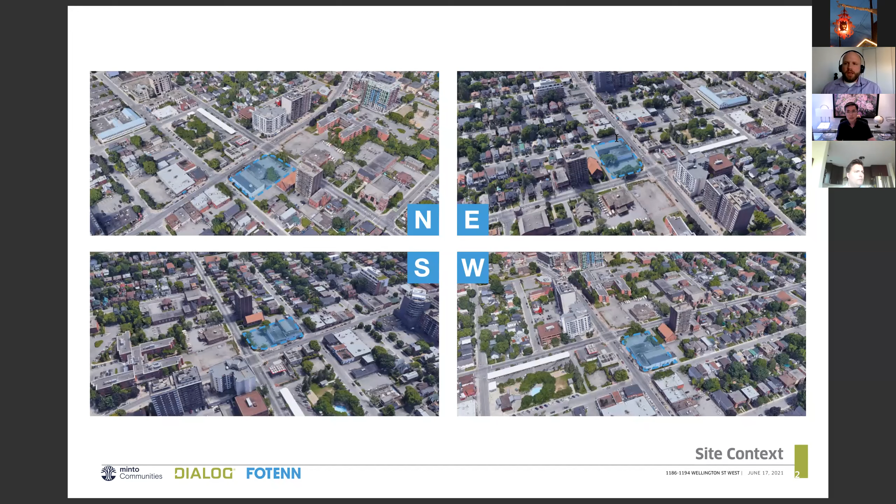The next slide is the official plan. The official plan designation for the property is Traditional Main Street, given the Wellington Street frontage. Traditional Main Streets in the official plan are envisioned as compact, pedestrian-oriented, mixed-use streets, and they are target areas for intensification. New buildings are encouraged to enclose the street edge and create a pedestrian-friendly scale and environment along this street.

Policies of the official plan support heights up to 9 stories generally, unless a secondary plan specifies otherwise, as it does in this case—we'll talk about that shortly. Requests for greater heights than 9 stories are considered under specific criteria in the official plan, including proximity to transit, provision of a community benefit, conformity with urban design compatibility policies, and a comprehensive review of impacts. Our work to date, preparing this application over the past few months, has involved looking at those criteria as we propose a building of greater height at this location.

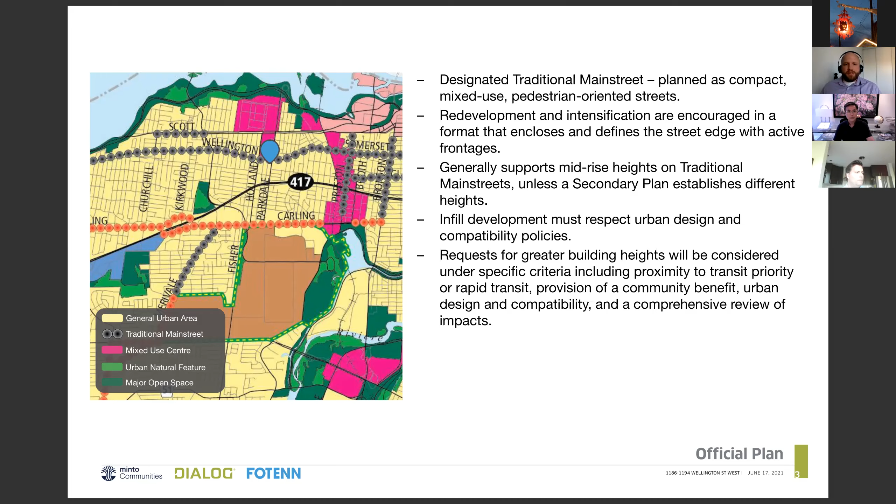Looking at the CDP and secondary plan, the property is within the Traditional Main Street designation in the Parkdale Park area, shown here on the map. Both plans speak a fair bit about the intersection of Parkdale and Wellington, recognizing its importance and prominence within the corridor.

Development at this corner is encouraged to include a variety of active uses at grade—retail, restaurant type uses—and also encourages widening the sidewalk and public realm to provide more space at the corner of Parkdale and Wellington, and along the street where sidewalk width is fairly limited. The secondary plan and CDP support building heights generally up to 6 stories along the corridor, but at the intersection of Parkdale and Wellington, it recognizes a height of 9 stories at the corner, given its prominence.

As Kevin noted, we are planning to propose an official plan amendment to permit the proposal we're here to talk about tonight, amending the secondary plan to permit the taller building. In terms of the zoning bylaw, this site is zoned Traditional Main Street with subzone 11.

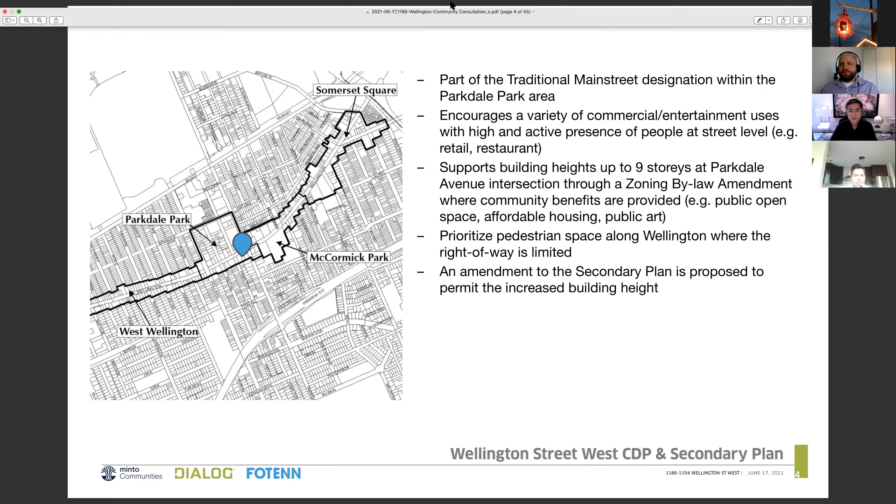The Traditional Main Street zone permits a range of mixed uses, including retail and residential, as proposed here. Exception 1815, which applies to the corner property—essentially the Rexall parking lot—also sets a minimum building height of 4 stories, given the corner location. We will be submitting a zoning bylaw amendment together with the official plan amendment to permit the proposed development, rezoning the three parcels that make up the subject property with a site-specific exception and schedule.

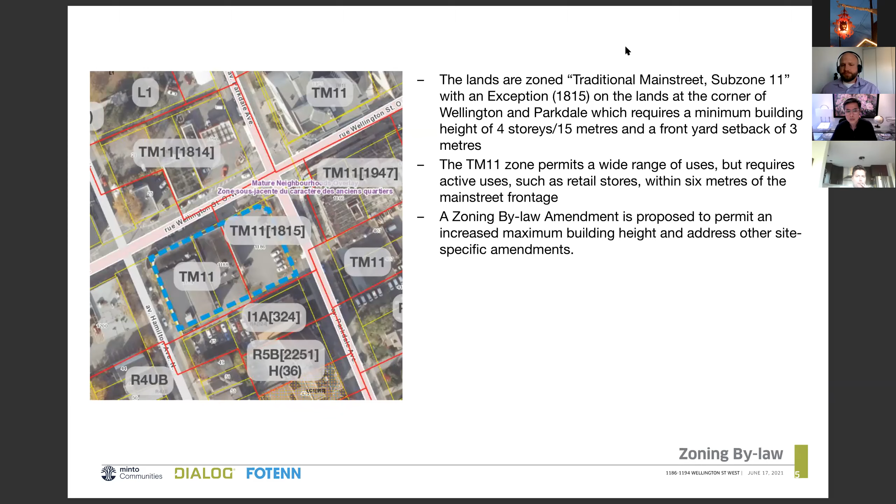So I think the most prominent question, as Kevin noted, is why a high-rise at this location? We've put a lot of thought into why we think a high-rise fits at this corner. We are proposing an 18-story building right on the corner of Wellington and Parkdale, with a 6-story podium extending across the Wellington Street frontage and stepping down to 1 story along Hamilton Avenue. Simon will present more details of that.

A few reasons we felt this site was appropriate for high rise are noted here. First, lot size. Along this corridor, the full block width is fairly rare, and it affords us the opportunity to transition within the site from a higher building down to the adjacent low rise and down to other parts of the corridor. Given the corner, we felt that's doable and appropriate for the site.

The site also has 3 public street frontages, which provides lots of opportunity for activity and pedestrian interaction at street level. We've tried to do that through retail uses at grade and a POPS space extending around the side of the building. We also recognize the prominence of the intersection, as does the CDP in the secondary plan. It's an important intersection and deserves to be marked.

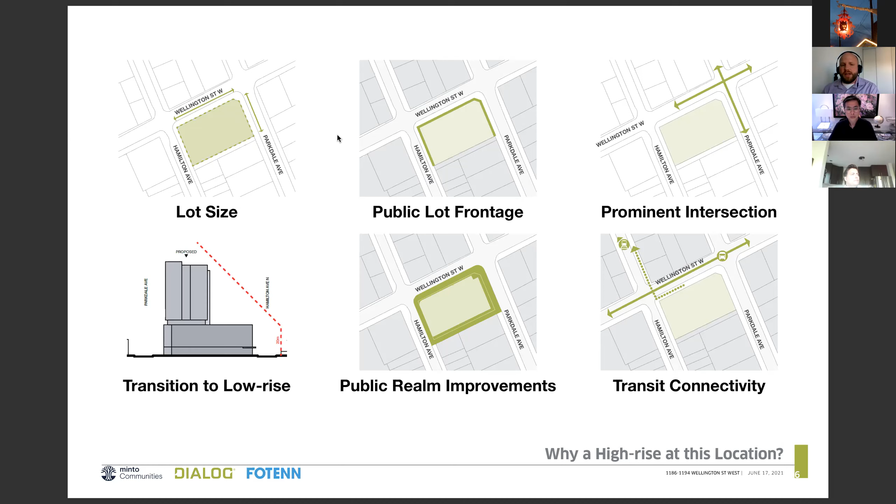So those are the reasons we've come to for a high-rise building, and we intend to put those forward as part of our secondary plan amendment, as criteria for why this site, in our opinion, fits for high-rise. Finally, looking at the urban design guidelines on the next slide, Simon, for traditional main streets and urban design guidelines for high-rise buildings, we've looked at both in terms of the design of the building. These provide direction for both traditional main streets and high-rise buildings.

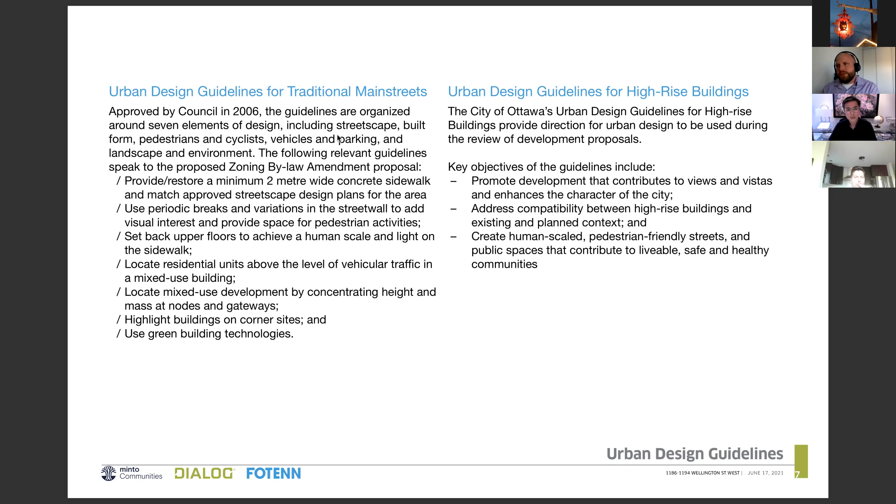We've taken the direction we can from that and applied it to the building - things like the angular planes and separation from high-rises, the height of the podium, that sort of thing. So with that, I'll pass it over to Simon, who will walk you through the actual design of the building.

Thank you, Paul. In this context view, I'd like to recap a little about the context. Our site is shown in the middle in purple. The existing buildings are shown in gray, including a 13-story apartment just south of us on Parkdale. The approved buildings are shown in orange, including a 9-story building just to the east on the other side of Parkdale, and an approved 18-story development on Parkdale, 1 block north of Wellington.

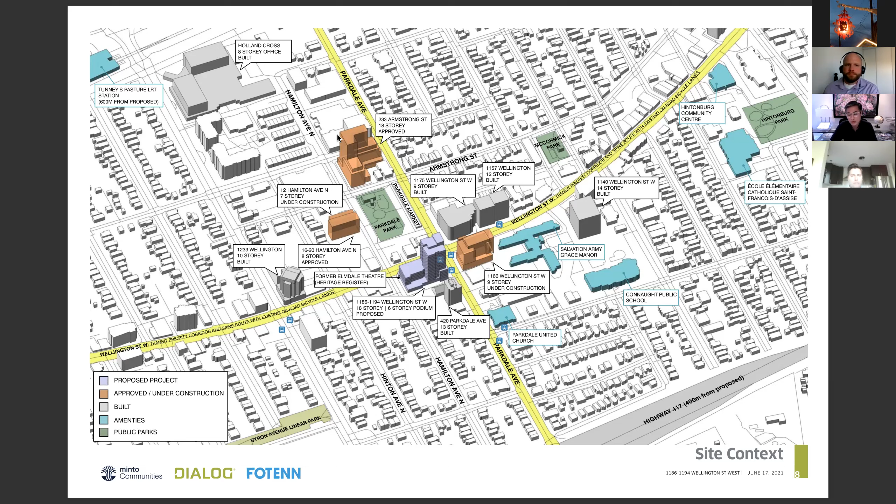The surrounding amenities are shown in light blue, and our site is about 800 meters to the Tunney's Pasture LRT station, as Paul mentioned. For the green spaces, Parkdale Park is not far to the north, and McCormick Park is to the northeast.

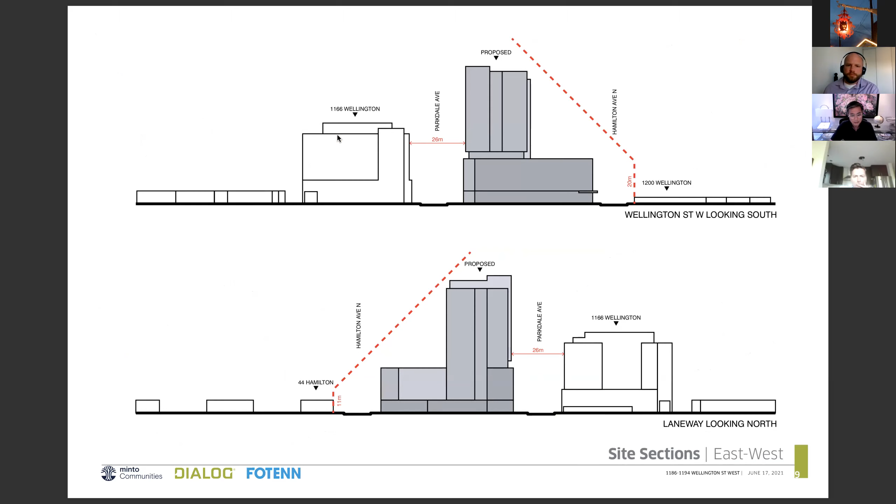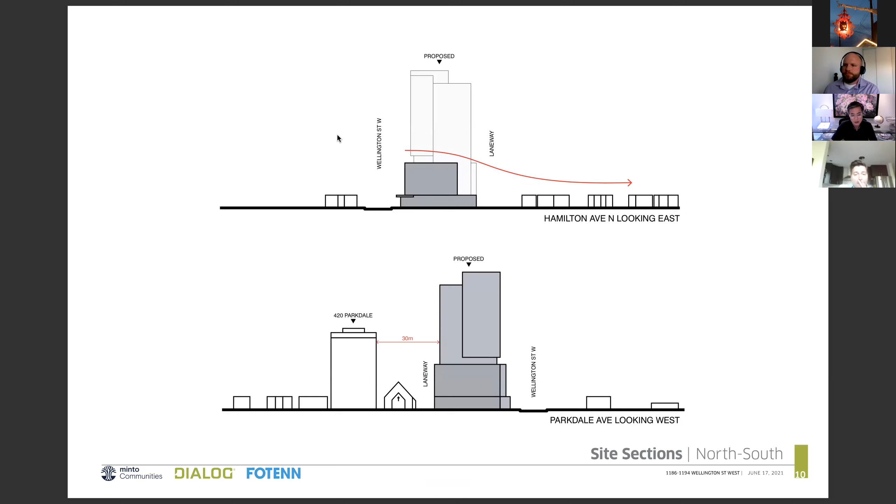Here's the top elevation cut along the Hamilton side looking east, with the 6-story podium of the building in the foreground, relating and transitioning to the existing low-rise residential buildings to the right along Hamilton. The bottom one is cut along Parkdale looking west, with the 14-story existing building on the left and the existing church in between. Our proposed development maintains a 30-meter separation distance to the existing 14-story building.

For building massing, we have the 1-story base, mostly retail. Initially, we added an 8-story residential podium on top to make a 9-story building. But because it was rather massive, after discussion with staff and councilor, we decided to reduce by 3 stories to make a 6-story podium.

We also recessed the corner at Parkdale as a POPS and added a 3-meter setback along Parkdale to widen the public realm. And we proposed to remake the Elmdale Theater marquee canopy at the Hamilton corner as a special feature.

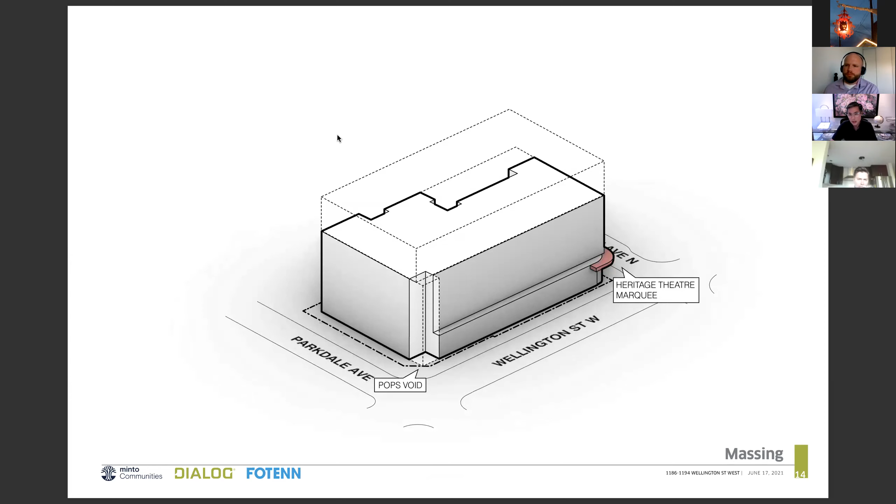With the reduction of the 3 stories, we added the floor area in a vertical mass to the Parkdale side and kept the main podium along Wellington at 6 stories, creating a lower scale along Wellington and a better transition to the low-rise on Hamilton. We also believe the taller height on Parkdale can create more hierarchy there, noting there is more transit and more pedestrian movement on this busy corridor.

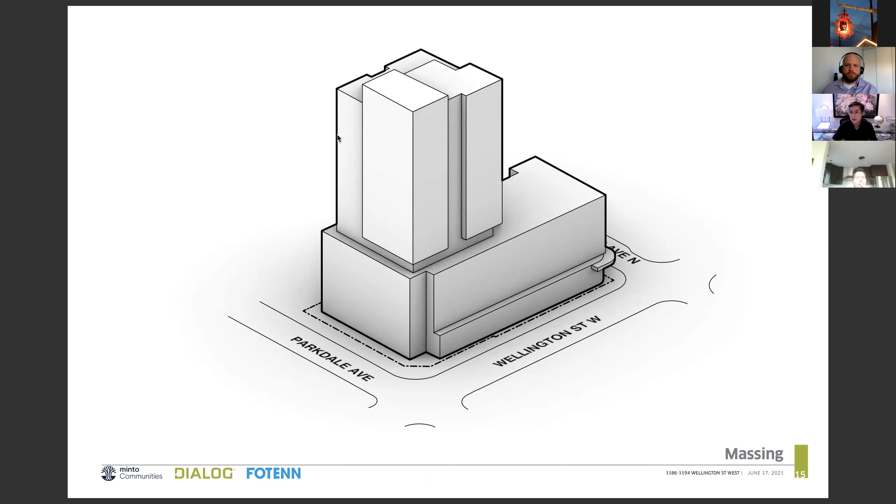This illustrates the podium and the various uses of our proposed building. In the site plan, the lightest gray color is the 1-story podium. Then we step back right away and go up to 6 stories. The taller portion on the right is shifted to the east along Parkdale.

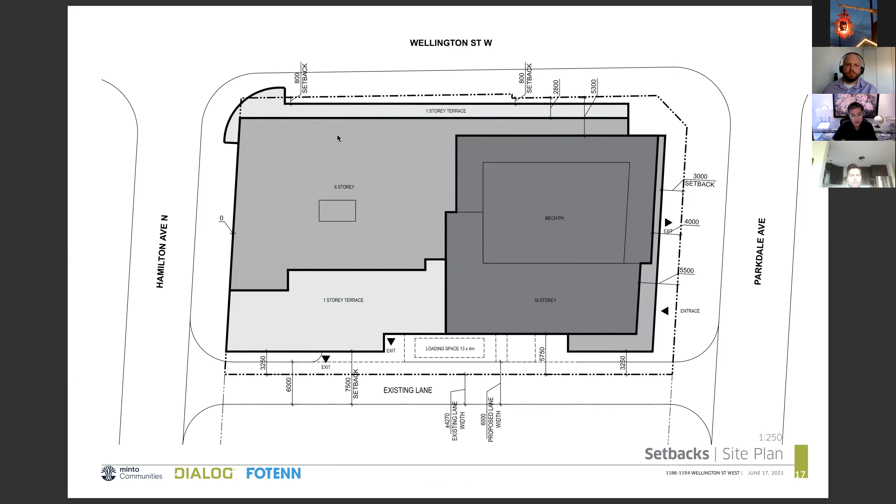At the ground level, the retail fully lines the Wellington frontage. The north retail face is set back another 0.8 meters to create a wider public realm on Wellington. The northeast corner is recessed as a larger POPS space together with a 3-meter setback on Parkdale.

In the northwest corner, there's a recreated Elmdale Theater marquee entrance canopy. These two corners of the Wellington frontage will nicely bookend this block and help activate this neighborhood along the stretch. The ramp, bike parking, garbage storage, and loading are placed towards the center in the back, while the retail and the residential lobby anchor the two outside ends.

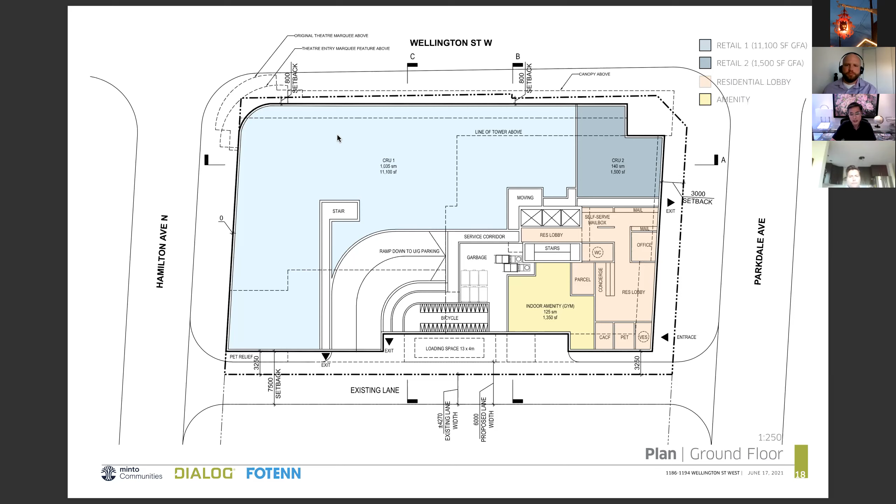We want to widen the existing laneway to a full 6-meter width and dress it up as a woonerf, to make it a safe and pleasant environment.

Going up, this is the typical floor plan podium with residential units lining Wellington with a minimum of 2.8 meters setback. The typical tower plate starts on the 8th floor and goes up to the 18th floor, with a total 5.3 meter setback on Wellington and 4 meters on the Parkdale side. The floor plate is 750 square meters with 12 units per floor.

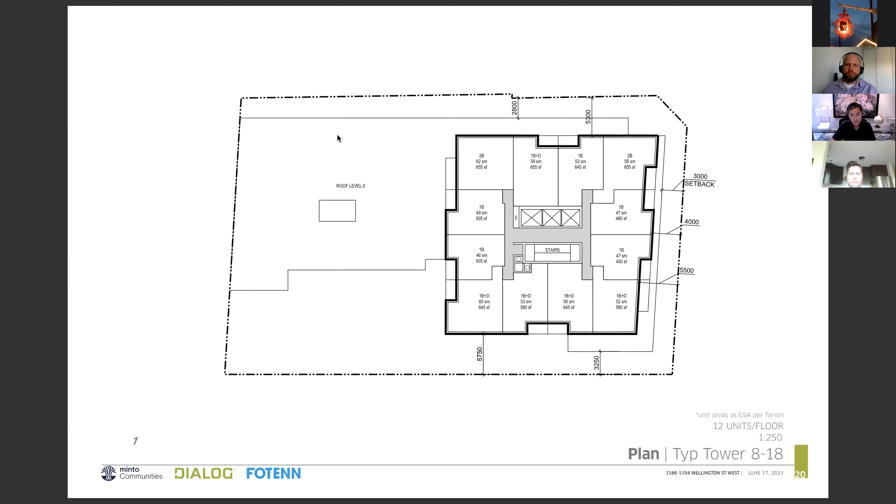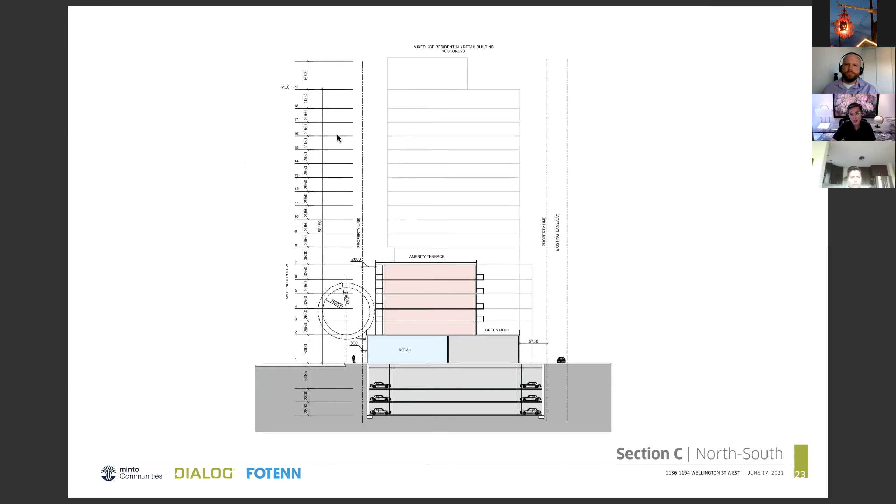Here are a few massing views of the proposal. Notice we put the height and density on the Parkdale side and lowered the podium to 6 stories along Wellington, which works well with preserving the spirit of the recreated Elmdale Theater marquee at the Hamilton corner, and to scale down the heights towards the Hamilton side and the south side of Hamilton.

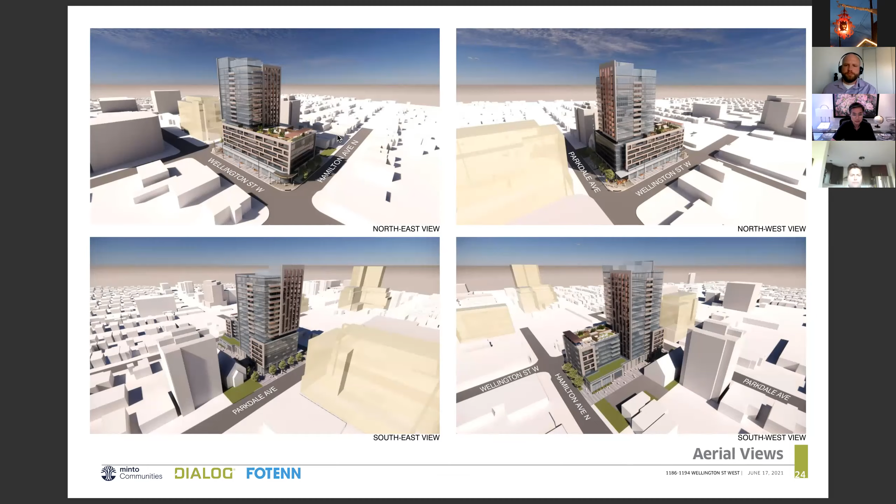Here's the north elevation, along Wellington, with a continuous glazed retail canopy with masonry piers, accompanied by its continuous glazed canopy. There's the POPS at Parkdale on the left, very close to the existing bus stop.

The 6-story podium is clad with masonry with various sized openings for windows and balconies, but with a more horizontal emphasis, keeping a comfortable scale and proportion for this main street. The setback taller portion is treated much more simply and cleanly, while focusing on the articulation of the 6-story podium.

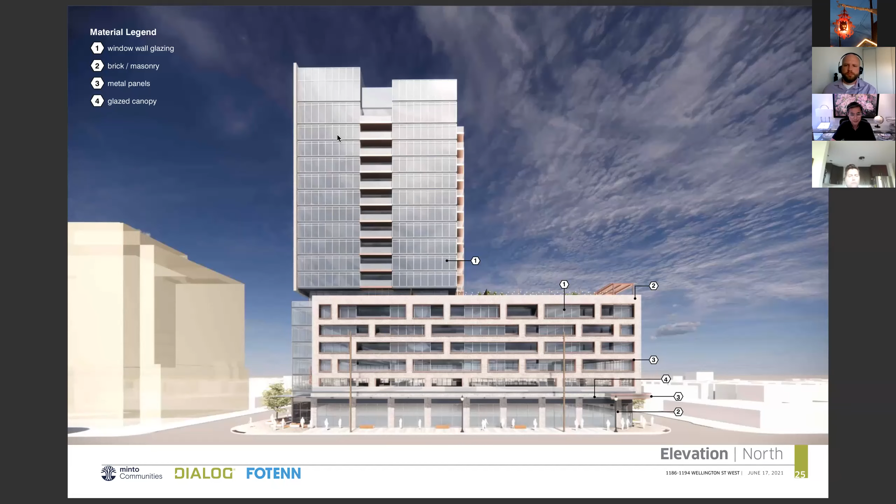This is the east elevation on Parkdale. Our building is separated from the South Church property by a laneway, seen in the middle, and the massing of the existing 14-story building on the left.

On this elevation, we want to do the opposite of the north elevation, reversing the masonry treatment to the taller portion for vertical emphasis and downplaying the amount of balconies, while on the podium we want to keep things clean and simple, with a few French balconies.

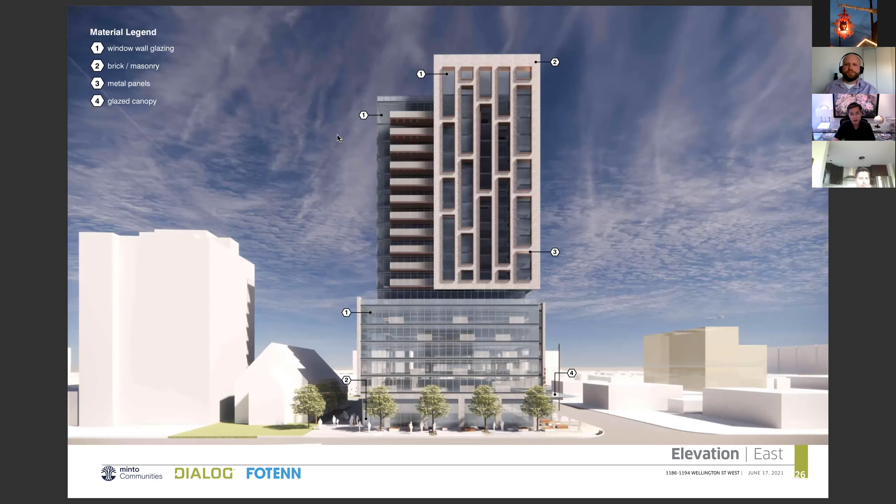Similarly, on the west elevation, the end portion of the 6-story podium is a simple facade with French balconies, anchored by retail at the ground level with the same masonry pier treatment. The taller portion is fully recessed, intentionally, away from Hamilton.

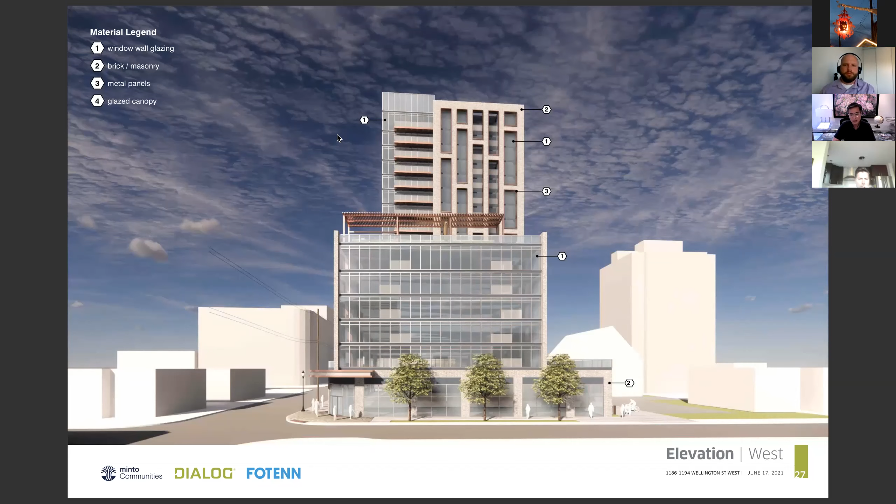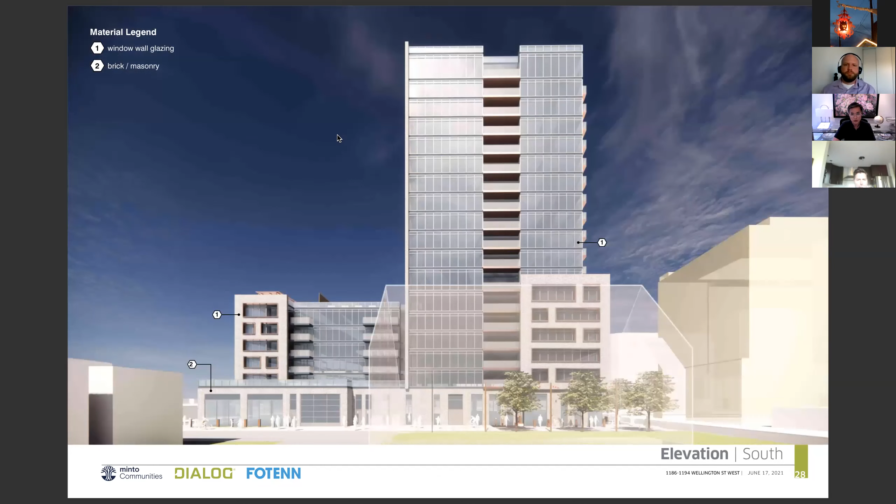The shift of the massing from the 6 stories to the 18-story tower is very apparent in this view, with the existing church property in the foreground hiding the base of the building.

This is an eye-level view on Wellington, showing the recessed POPs with the 3-meter setback along Parkdale, the masonry detail facade of the 6-story podium, and the ground level masonry piers with continuous glazed canopy, enhancing the public realm and pedestrian environment, especially at the corner where the POPs is.

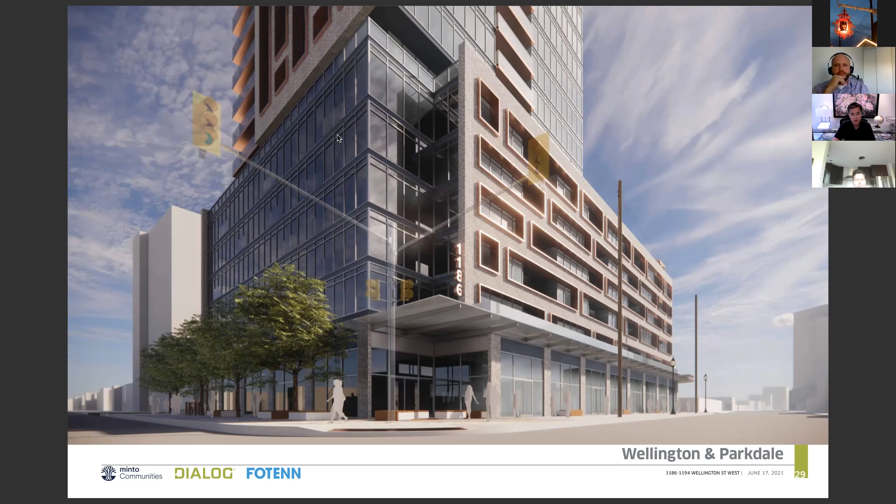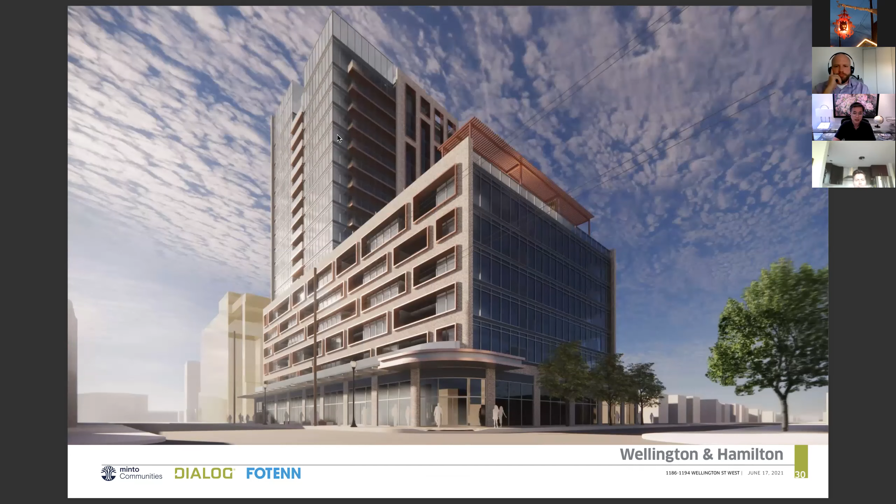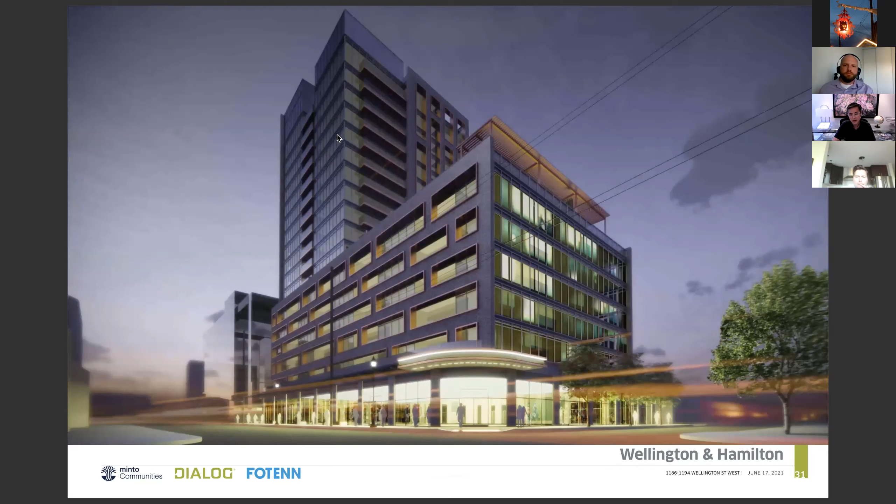This is on Wellington at the corner of Hamilton, showing the recreated Elmdale Theater marquee canopy and the retail entrance addressing this special corner. This is the same view on Wellington, showing the recreated canopy lit up at night, with the corner as an entrance anchoring the public realm from this end of the block.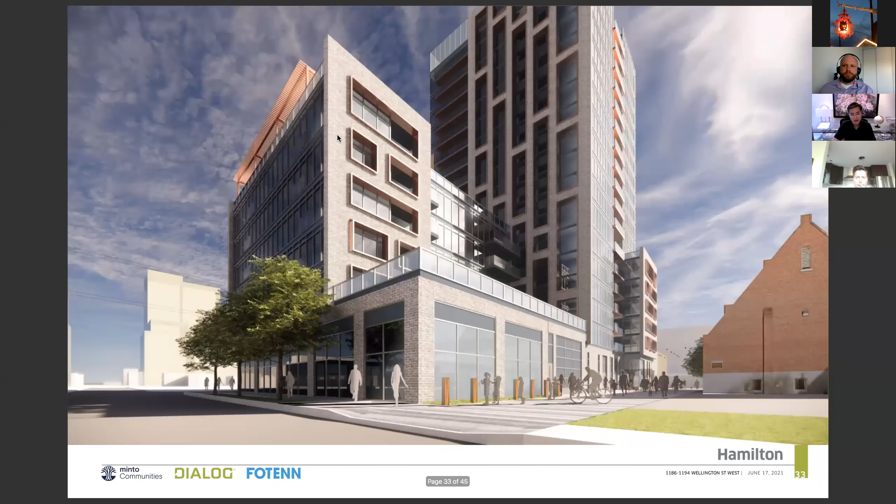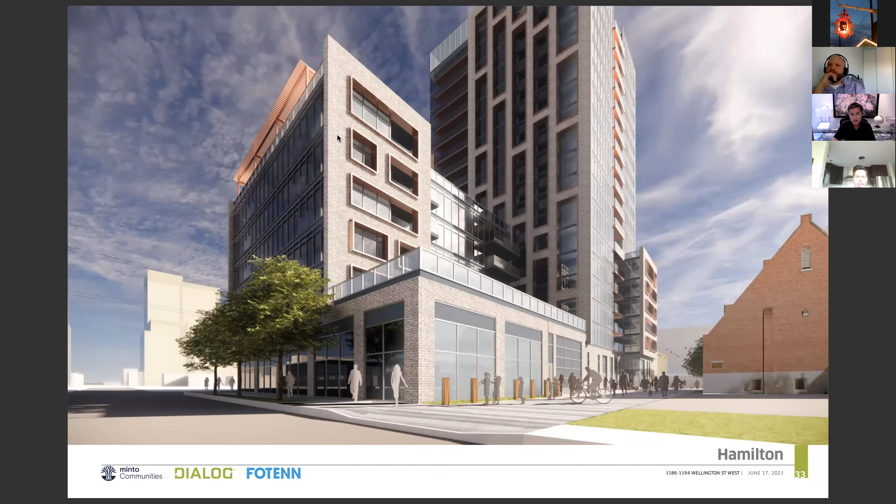This view is closer up on Hamilton, on the south laneway looking from the west. There's an imagined laneway with special paving, activated and much improved compared to the current state of a back lane. At this end, the retail can wrap this corner with much needed activity.

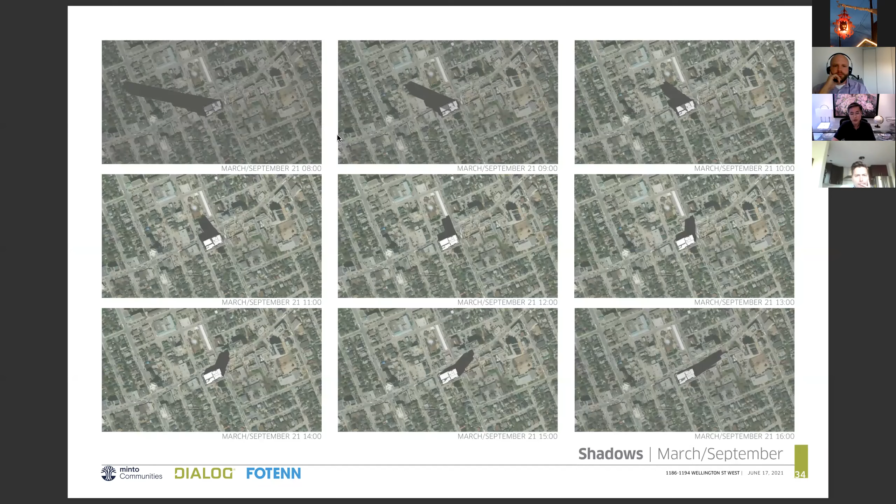Here are some shadow studies we did, showing the March and September shadows. Most of the shadows fall onto the commercial lands to the north of the site, and our shadows have very little or no impact on Parkdale Park to the north, more so in March and September.

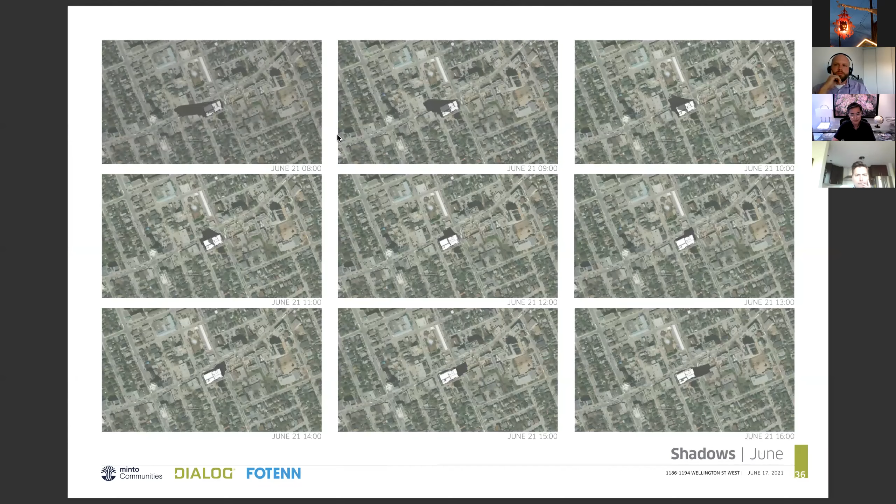And here's Bryce, my partner on the landscape design. I'm going to take you from December into the summer months, my preferred months, and take a look at the landscape.

The landscape and site design responds to both the architecture and the context of the site. As mentioned before by Paul, we truly are taking a 360-degree approach, using distinct paving that will wrap around the building, improving the public realm and building interfaces on all sides. The northeast and northwest corners have unique unit paving that will act as a welcome mat into the building and complement the cinematic gestures that Simon was talking about, carried through in the architecture.

We're looking to improve the pedestrian experience around the site by planting street trees wherever possible, using soil cells to improve soil volume and negotiate utilities on Parkdale Avenue, and planting softscape on Hamilton and the adjacent church lot. The trees will have the right environment to grow substantially and bring character, comfort, and improved canopy to shade the area.

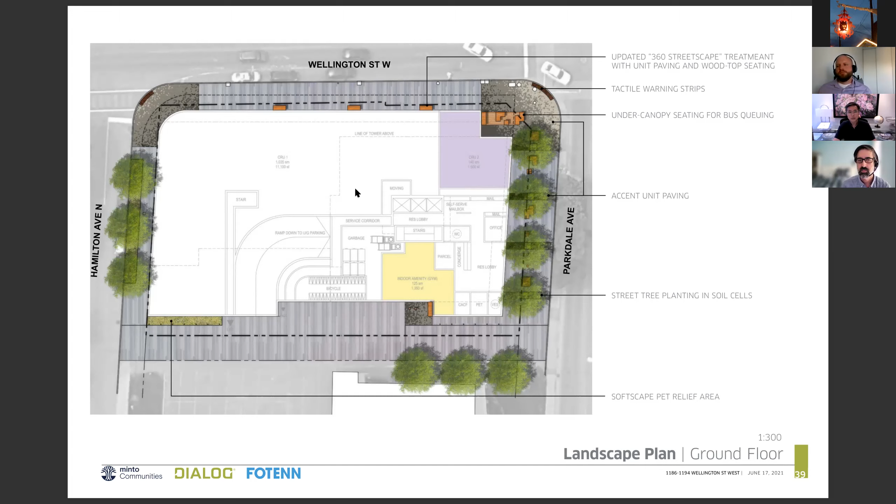A key part of the landscape design is the additional privately owned and publicly accessible space. Our design intent is to seamlessly integrate the designed POP space into the improved public realm network.

The northeast corner is where you'll see most of that, and it supports this notion of the POPs through the use of bespoke benches. Flexible in the layout, they'll enable access to the building, but also be a space for transit users to casually wait for the Parliament bus.

This will happen while they'll be protected from the elements by the extended canopy above, shown earlier. Adding both feature lighting within the benches and projection from the canopy above, the space will be vibrantly animated in the evening, making it a safe place to be at night. The focal point of the corner carries south along Parkdale with an improved paving treatment above the soil cell system.

This leads us to the laneway, which extends to the southern entrance. The unit paving we're proposing, if you're aware of the paving over at Lansdowne, we're suggesting the same type of paver. There will be a reduction of curbs and an introduction of bollards to support that approach. In many ways, it's designed as a Woonerf.

It'll be more than back of house. Cyclists can lock their bicycles next to the gym amenity and maintain their bikes with a repair station. A dog relief area is also being proposed in the southwest corner for quick relief, but really you're going to take your dog over to the nearby Parkdale Park, which is right as soon as you get out of the building.

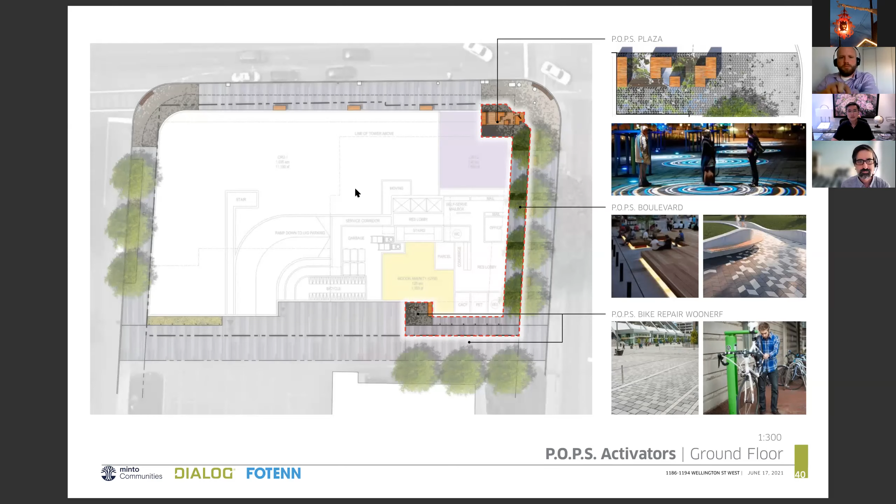The amenity terrace on level 7 is similarly community focused in its design approach. A community garden is proposed where it'll engage residents through the act of gardening, and the harvest can later be enjoyed with the adjacent barbecue and covered seating areas. There's a stair access that comes up - and with that we can pull some walls off of that stair access and create rooms extending from the structure.

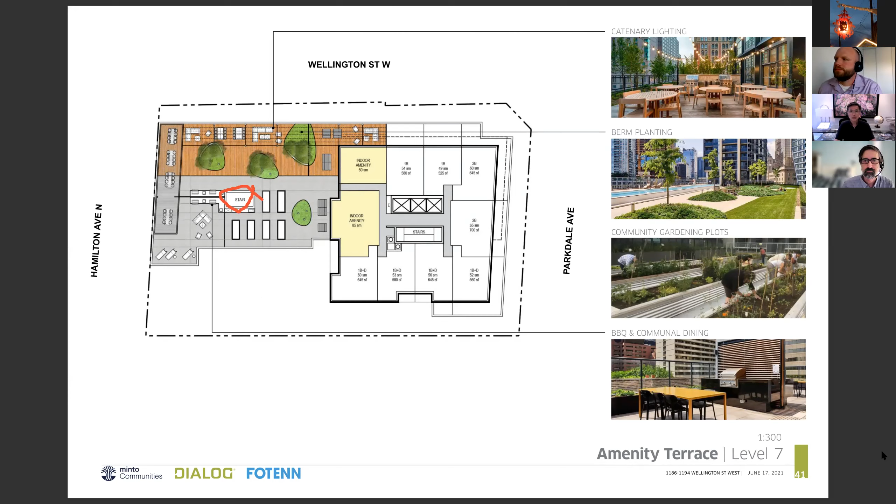Mounds of planting are added to support some larger trees on the terrace, softening the rooftop and making it an urban oasis within the city. The Wellington Street edge would also be lit with catenary lights. The hanging lights will not only animate the terrace, but also contribute to the streetscape below - you can imagine being on Wellington and catching a glimpse of the lights on the rooftop.

In this perspective, you can get a better sense of what Simon and Paul were talking about with the Woonerf, and what we're trying to achieve: a pedestrian-friendly environment and accommodating space that's visually appealing. This goes above and beyond your standard utilitarian laneway designed for vehicles - it's really meant for people as well.

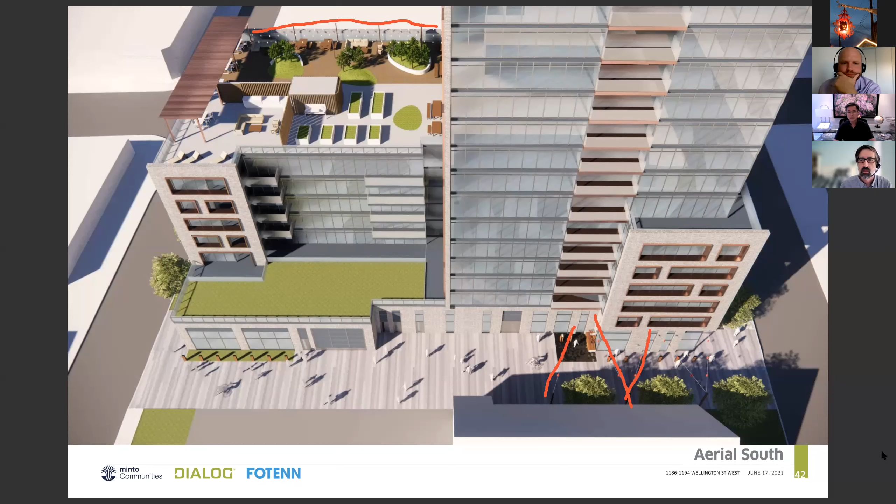We'll be carrying the unit paving through the laneway, which again supports the 360-degree approach to the site mentioned earlier. We'd also be looking at putting in some catenary lights, which you can just faintly see here, to give it more of a human scale but also animate it in the evening time.

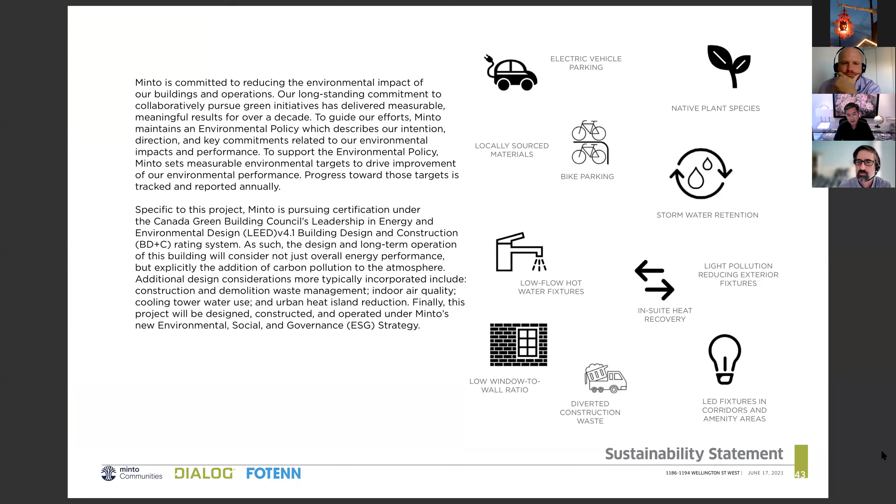In closing, I think this design concept proposed to unlock and adapt to the unique features of this site, and to accommodate with little or no impact to the surrounding context. So that is the presentation we have for you tonight, and our client and design team are here to answer any questions you may have. Thank you.

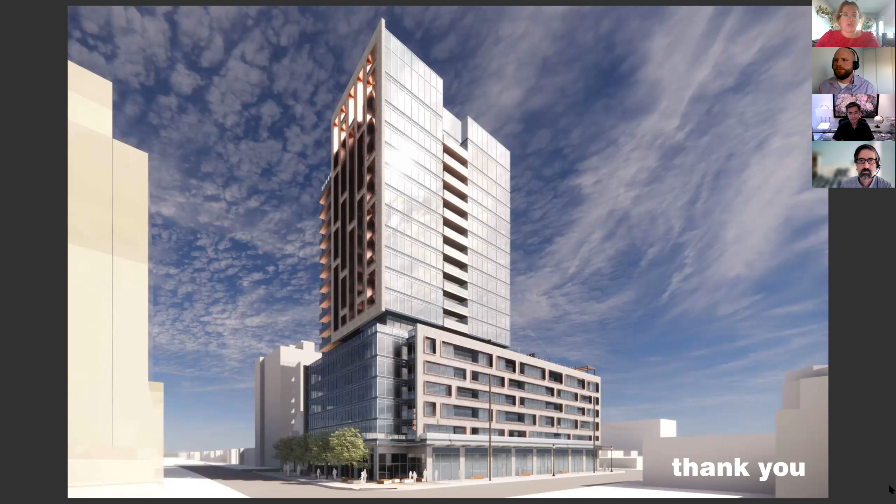Traffic on Parkdale is already unmanageable. How will this be addressed with the addition of this many new units?

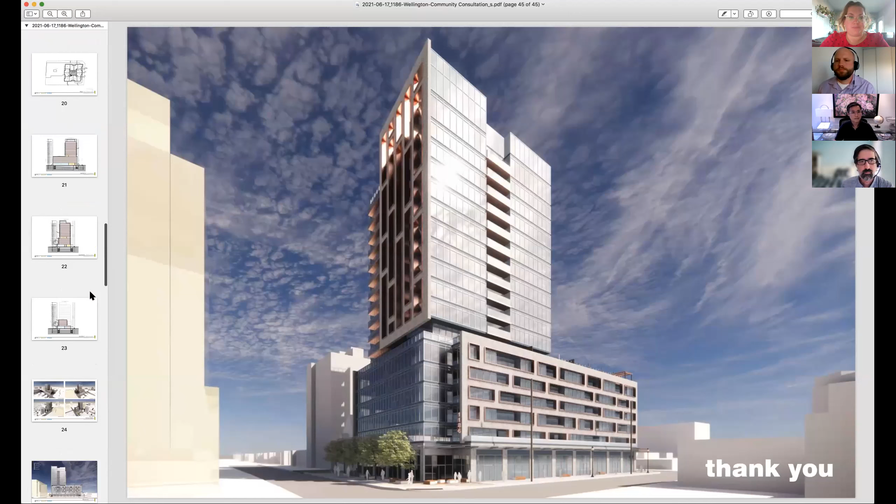Currently, we haven't submitted the application yet, so not all the studies are done, but we're in progress. Currently, the site is going to rely significantly on transit and access for a lot of the peak hour traffic, which is typically the condition everyone is well aware of on Parkdale. While the full block site provides a lot of opportunities from the planning, architectural, and landscaping design sides, it is a challenge from the traffic and access perspective.

What we've tried to do, and we're moving ahead with, is keeping that access in the back laneway, and it's actually probably going to restrict access out onto Parkdale, with the understanding that the queues and movements coming from Parkdale up to Wellington would not permit all the movements we'd like to make. So currently most of the access is coming off of Wellington on the Hamilton block length right now.

Thank you. There's a similar question: Hamilton, as a residential street, is already very busy due to backups on Parkdale. This development will add to the traffic problems. What are you proposing to regulate and calm traffic on the residential road of Hamilton?

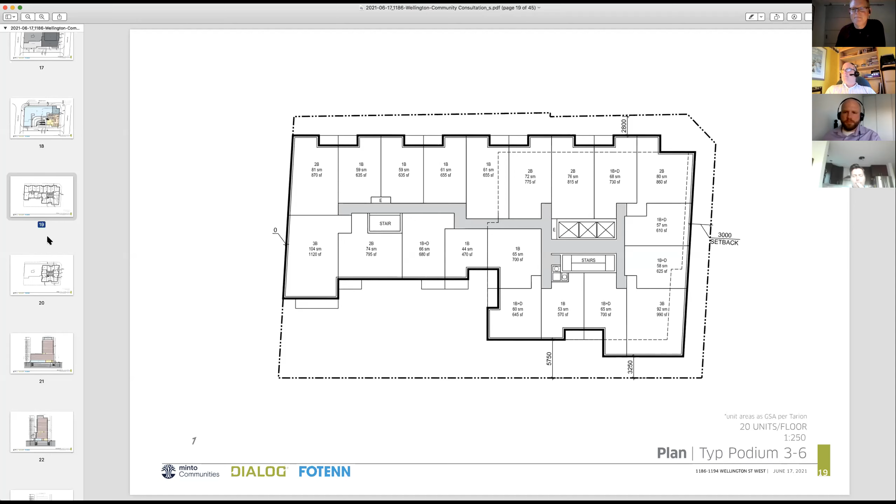Now there are a lot of questions about the laneway. It looks like you're resurfacing the laneway - is it a city laneway? Who is maintaining it currently, and who will be responsible for maintaining it when it's paving stones?

Andrew, I don't know if you want to answer that one. The laneway is public, the city maintains it now. I don't know if anyone on the webinar this evening has ever seen the city plow the lane. I'm going to assume tenants are responsible for clearing the parking area and the lane behind, and that the church has a hand in that as well. I'd assume that under this we'd have discussions with the city over the ability to widen the lane and surface it, so we get our 360 design approach to the public realm. And I'll assume that as the property owner, Minto would be responsible for clearing the snow.

Andrew, I don't know what your experience is dealing with the city on public lanes, but typically we don't deal with this at OPA - it's a really good question, we should definitely keep it on. But I like that Minto is going to maintain it. There's also the part about maintaining the paving stones, and from my experience with the material we're selecting, as used at Lansdowne, it requires little maintenance beyond regular paving materials because of the design of the unit paver.

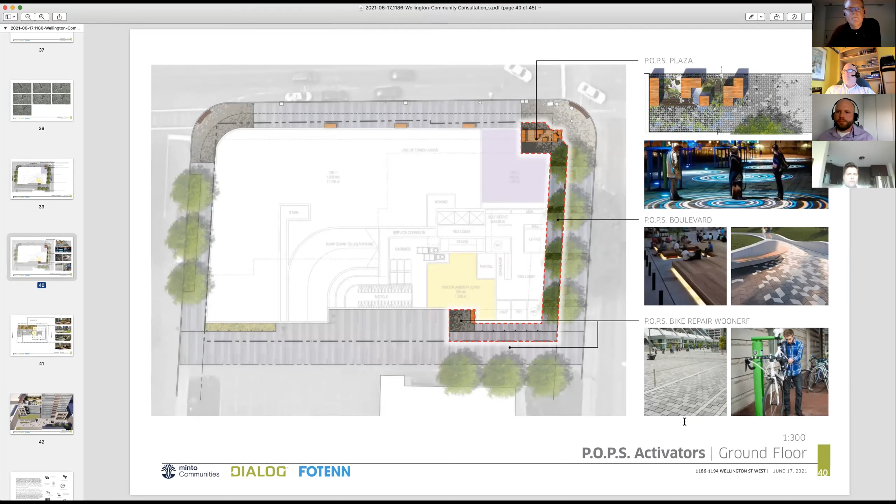Yes, I can say that they do coexist. There's a number of examples where woonerfs have been implemented where you can have vehicular traffic as well as pedestrian traffic. Through design changes, it isn't treated as a regular roadway, and people traveling through the space respond differently - it's meant to act more like a driveway coming in as opposed to a thoroughfare or roadway.

I'd also highlight how we've set in the loading area. So when a truck would come in for garbage or a move-in, it would be off the main drag of the woonerf, so it would still be accessible for all modes as well. That's one of the things we've incorporated.

Thank you, there's a few more questions about the laneway, so I'm going to stay on that topic. What are your thoughts on what sounds like a lot of pressure being placed on a public laneway?

I'm not sure what is meant by a lot of pressure. Is it a question about the public pressure? I'm assuming, Bryce, the question is about just how much is happening, pedestrians loading in and out of the garage. I think that's my guess.

Yeah, the way I see it, the flexibility is there, and if you do have pedestrians coming through, and even loading, there is enough space to accommodate it. You're not going to get a lot of traffic all at once, we anticipate that it's going to be a mix of uses throughout the day.

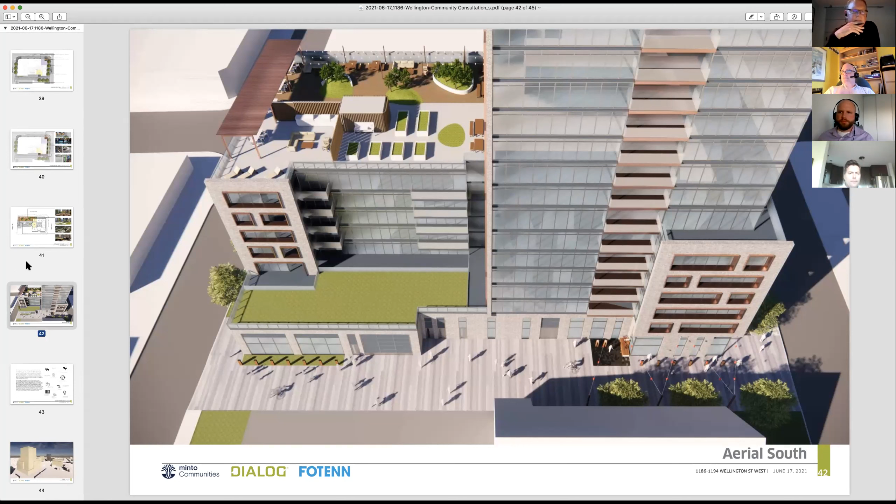Okay, thank you. And I believe we've spoken to this already, but I'll read it out loud just to make sure in case anyone wants to add anything more. The laneway between Parkdale and Hamilton Ave North will be the only access for parking and loading for tenants, trades, and retail. This laneway is busy now. How will it be built and designed to still allow for pedestrian use with so much traffic going both ways?

Do you want to add anything more on that before moving off? I think the only thing that I would add, and Bryce, you may have something, is that we're widening it for a reason, so it can accommodate all of these uses. Right now that lane is a little unsafe, just because it jogs and it's very narrow. So I think we see this as a vastly improved condition.

Bryce, I don't know if you want to add anything. No, I think on top of the other comment, a good one to add as well. I think the key thing here is with the loading space, it's a pull in, pull out. There's no truck, no 3-point turns, no backing, and that right there is immediately a better situation than the current lane, which is 4.5 meters wide, with a negative slope loading area and a jog in the middle of the lane as you come around the back of the church to the parking. So a clear sight line all the way through will certainly help, and then the textured features and the lighting will absolutely improve things.

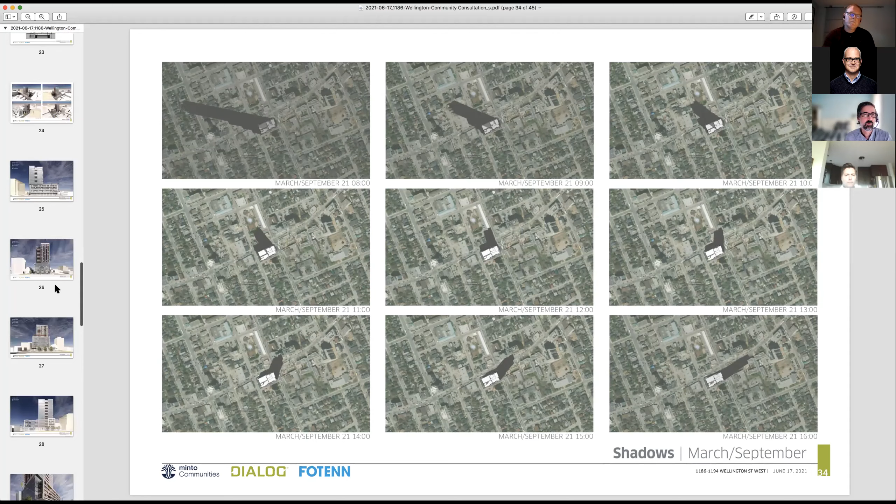But that's really what we see as the unique element of this property - its ability to accommodate a high rise in what we feel is a contextually sensitive way. We don't see that being possible on other sites along the corridor. We are still looking at other sites to see if this could be done in a sensitive way, but at this point our sense is that this site is unique for that reason, and so it's appropriate for a high rise because of that. That's our intention through the official plan amendment and zoning bylaw amendment - to recognize that uniqueness and make sure it is specific to this site as a potential high-rise site.

Thank you. What type of retail is envisioned for the ground floor space level?

I can answer that. We're actually in talks with Rexall, very interested in coming back to this location. They've even suggested that they would take all of the space. Yeah, and I think we would prefer that they didn't, so that we can mix things up a little bit along the frontage along Wellington. We kind of have 2.5 sides of potential retail here, so we want to animate that as much as humanly possible. We've got the Pops at the super busy corner of Wellington and Parkdale, and then we have the theater marquee element that we're going to revive on the Hamilton side.

In my opinion, ideally, we would have several businesses in this space.

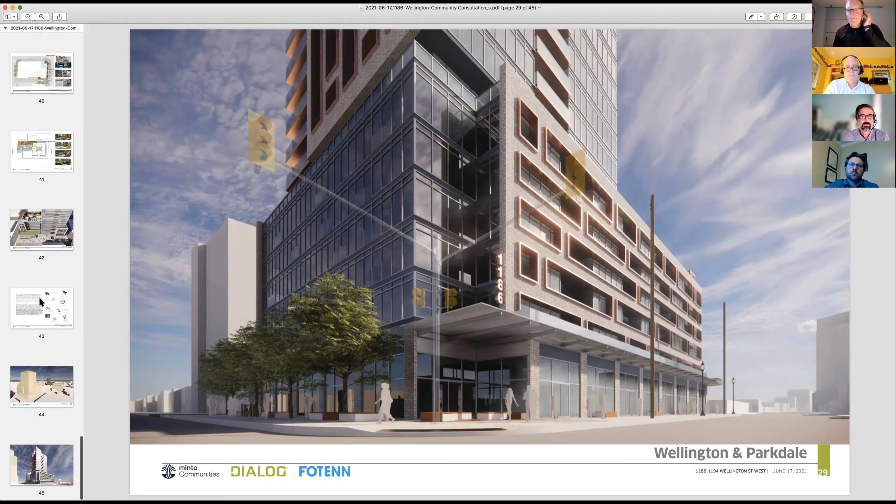Okay, I can answer that. So one of the things that we pride ourselves on at Minto is our environmental approach to all of our projects. Projects in Ottawa and in Toronto, whether they're mid-rise or high-rise, are third-party certified.

And in this case, we'll be pursuing LEED version 4.1 BD+C.

Lansdowne was LEED Gold. Upper West in Westboro was silver. Minto Beechwood was LEED Silver, and we're pursuing LEED Gold on our second Beechwood project in New Edinburgh. So it's a big part of our projects and of our development ethos.

Minto has an ESG strategy, an environmental, social, and governance strategy that our projects support and reflect. So this will be a very energy efficient, low water using, high building envelope performance building.

All the lighting's LED, whether it's inside or outside. Motion sensors on lighting, all of that. There will be electric car charging stations in the garage.

We'll have car share in the garage, and high efficiency heating and cooling system as well. So absolutely, this will be a high performance building.

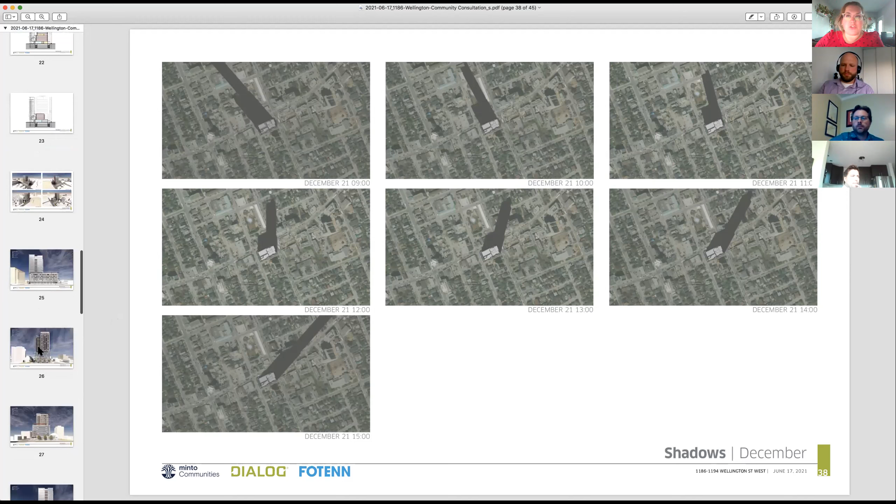Roland, responding back from the church conversation. Yes, he was asking about the church on the site.

Excuse me, what proportion of EV charging spaces do you initially foresee? Will the parking garage design be flexible, for example electrical infrastructure, to increase this number to future-proof the development? Yeah, I can answer that.

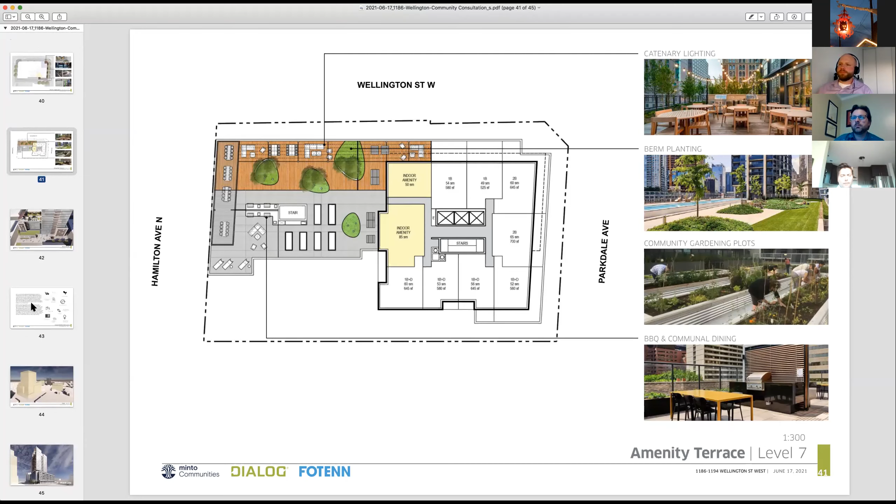So yes, in all of our projects we future-proof them from a car charging standpoint. The Ontario Building Code requires a certain percentage of parking spaces to have the infrastructure for future fit-up of a charging space. I think it's 20%. So 20% of the total spaces proposed in the garage would have to have the infrastructure present that a charging station could be installed in the future. In this project, it's too early to say how many spaces we would provide with actual charging stations.

I know at our Fifth and Bank project, I think we're providing 8 charging stations. There would be at least that number of spaces here. So that's a good question. Yes, EV is part of the LEED strategy, high-performing build strategy, and future-proofing down the road.

Okay, is there going to be a commitment to affordable housing in this development? This person notes that they might have missed this before, and I know we did talk about it before, but can you speak to that quickly again? Yeah, we did. Just to reiterate, we haven't gone into that level of detail yet. It's very early in the design of the building and the process, but that will be considered as part of the larger bucket of community benefits that we'll be looking at with the community for this building.

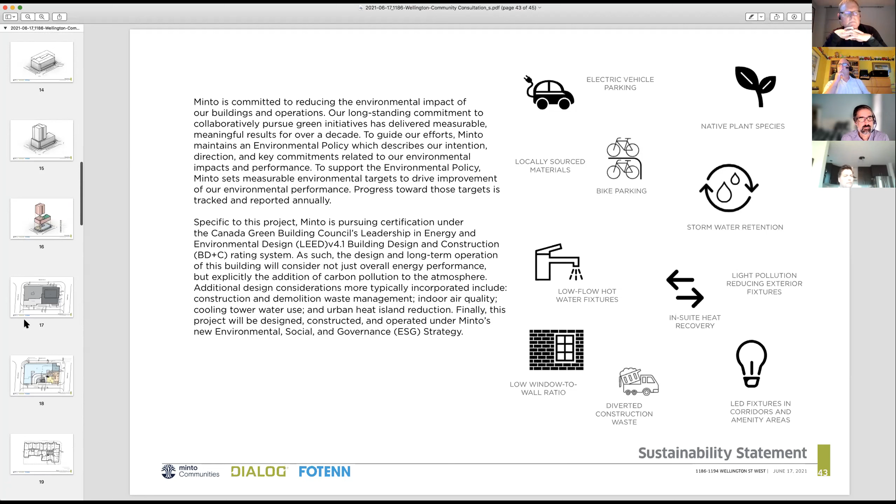I think we've touched on this, but I'm going to read it out loud just to be sure. Has there been analysis of the impact of existing developments in the area? We already have the huge buildings north on Parkdale, the approved 18-story development on Armstrong, the large new seniors residence at Parkdale, Wellington, etc. The real negative impact of all of this has not been felt yet, and this new proposal will only exacerbate the current issues with traffic congestion, noise, and will put more pressure on city services, buses, water, sewage service, etc. There has to be a more responsible view to development rather than maximizing profits and tax revenue, and preserving the quality of life and character of Hintonburg.

Does anyone want to respond or noted?

I don't know if Andrew has any comments on traffic, but to consider the background condition, including what is already approved or in the pipeline. I know from the preliminary analysis on servicing sewer, water, storm, and all of that, this concept is well within the city's existing capacity for those infrastructures.

I'll add that all these things are looked at as part of a development application, and they will be on dev apps. So from my side, the traffic, transit, cycling, pedestrian perspective, everything up to the current, other developments in the area, developments outside of this area that would come into this city - we do it as a kind of time sequence. Each one goes in sequence, so the next application in the area would then consider this application in their analysis. Each study keeps building on the previous study.

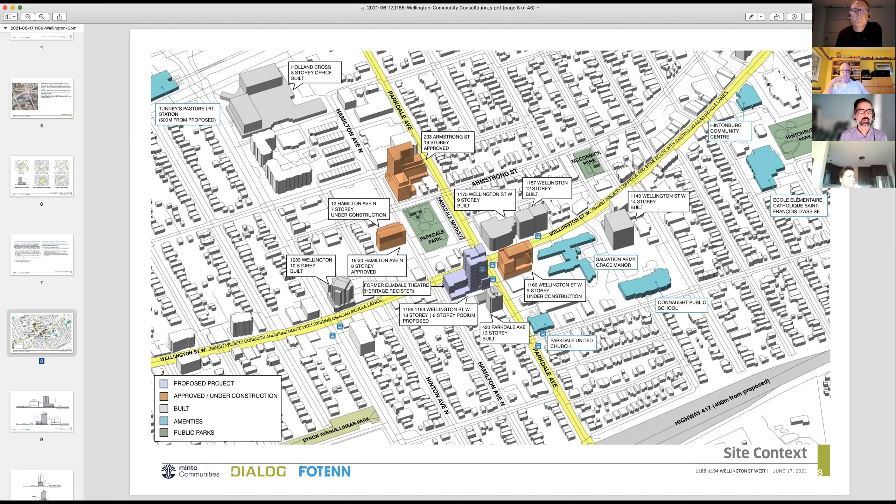I know Cheryl Parrott is on the call with the Hintonburg Community Association, and Tara is with the Wellington Village Community Association as well, who are looking hard at the thousands of residents that intensification is expected to bring to Hintonburg, Mechanicsville, Civic Hospital, Champlain, Wellington Village, and how that intensification is going to get turned into green space and parks and recreation facilities. I'm less concerned about services like water and sewer - the engineers have that well in hand - but the transportation infrastructure, how are we going to ensure that if we are expecting people to use active and public transportation, we have the necessary infrastructure for that? How are we going to alleviate the pressure that our ward feels, particularly emanating from the Champlain Bridge, by connecting our transit systems? How are we going to get people from Tunney's Pasture to Orleans and to Kanata using LRT so they're not on Parkdale? It's a lot of very large moving pieces, most of which are being discussed by City Hall right now. So Joe, please give me a call and we'll chat.

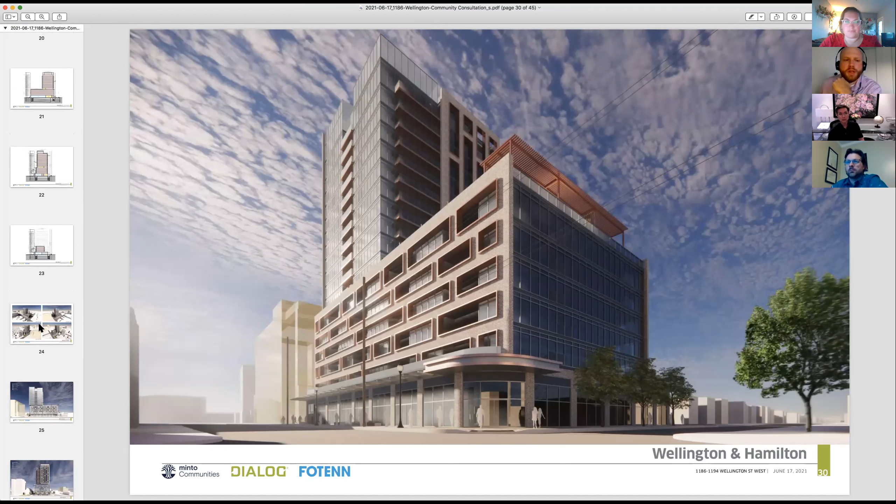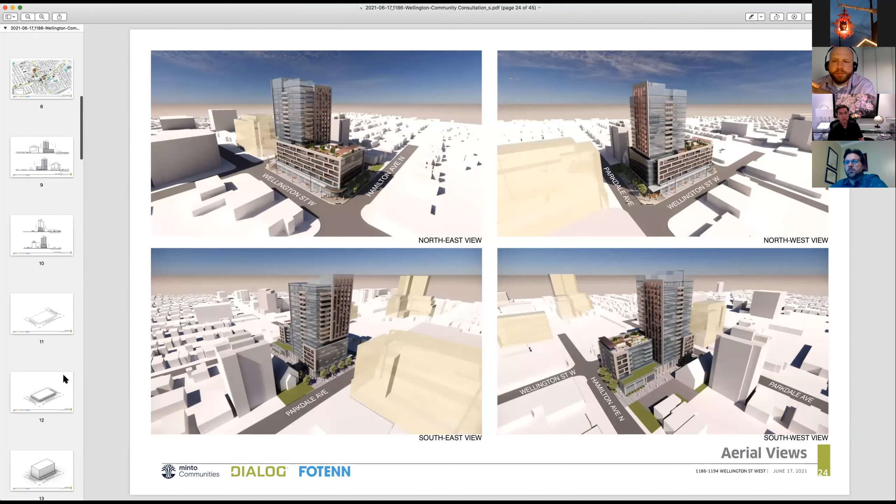Yeah, so as we've noted, it is mostly related to the unique properties, unique aspects of this property, and that's what we feel is the justification for high rise. We'll be laying that out more fully in our planning rationale that will be part of the submission. But with regards to the new official plan, those policies are still sort of in flux.

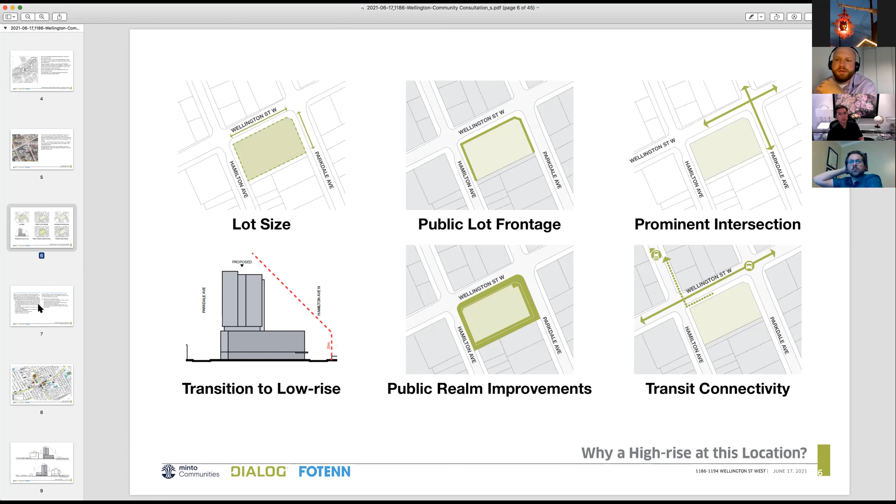Basically, the new official plan policies would defer to the secondary plan as a baseline, so we'd be in the same scenario in terms of what the policies say for traditional main streets. Based on the As We Heard It report that came out late last week, it's expected that those would stay sort of as mid-rise. And with regards to the policies around seeking greater height, there's the criteria for consideration of higher buildings, but we don't know what those policies are going to say ultimately. There was some language around that in the draft, but it's still in flux.

So as we're making a submission in the next couple of weeks, we would be subject to the current official plan policies and the current secondary plan and zoning. The new official plan won't take effect until the minister signs off, which could be 18 months, maybe 16 months, 2 years from now. We'll see how that goes, but I think this proposal is absolutely going to be viewed within the lens of the existing official plan.

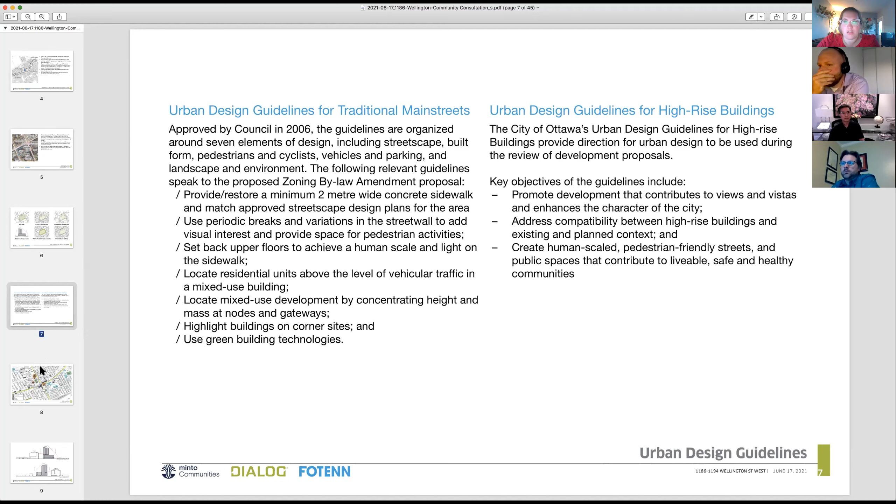Thank you. A question really for Jeff. With a project like this and the location of the lane, will you be looking at an option to add an egress, or restricting access from Wellington or the lane south on Hamilton?

Interesting question. It's been a while since I looked at this proposal, and obviously the lane is a concern for me. Adding an egress to Wellington, I don't believe meets with the city's policies of coming out onto an arterial street. Just speaking as someone who cycles through that block every single morning, I also have to say I'm not keen to have an additional garage added there.

I think the traffic is best brought in off of Parkdale or Hamilton, but I also don't want that traffic continuing its way down Hamilton Avenue North — again, full disclosure, in front of my house. I think the basic plan, if this proposal moves ahead in something similar to its current form, is the right one. But we need to be fierce on ensuring that traffic is not coming down the residential street. So no, I wouldn't be looking for an egress onto Wellington. I think that would make an unsafe intersection even less safe, and I don't believe they would allow it either, both for reasons of policy around egress onto an arterial, but also being so close to a signal.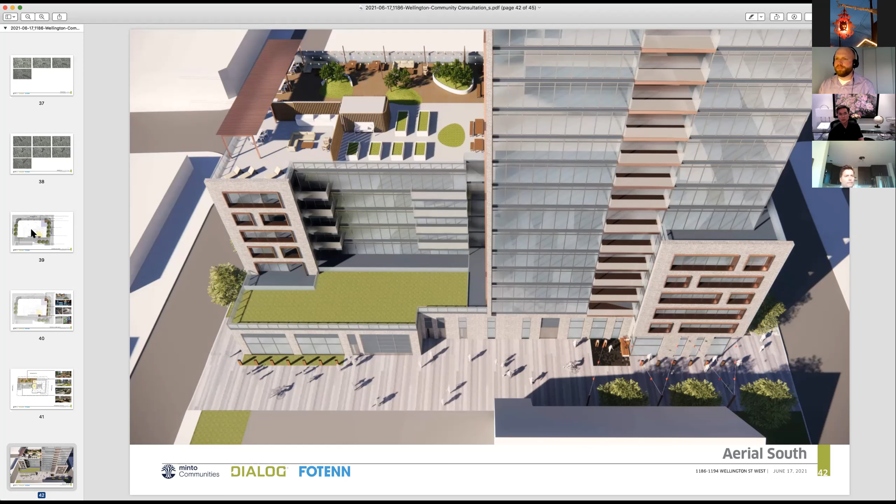So I don't know if I missed anything, Simon. There's actually a little bit of grass on the Hamilton side, so we're putting 3 street trees there in softscape. It's always better if we can put trees in softscape. So that's one location. And then we may be doing that green roof on the back, on that one-story piece at the back of the lane at Hamilton.

The city has very stringent rules for stormwater management, and we have to abide by all of those. I just want to say normally these large projects are an opportunity to improve the existing conditions. One thing I'll be sending into site plan, whenever we get to that point, is that currently there is a lot of runoff from melting snow that runs across the Hamilton Avenue sidewalk, and it becomes a massive puddle and freezes. It's a really bad spot, and contractors make it worse by covering the storm drain there. So I'll be looking for a big improvement in terms of managing stormwater and snow runoff from this project if it moves ahead. Good question though.

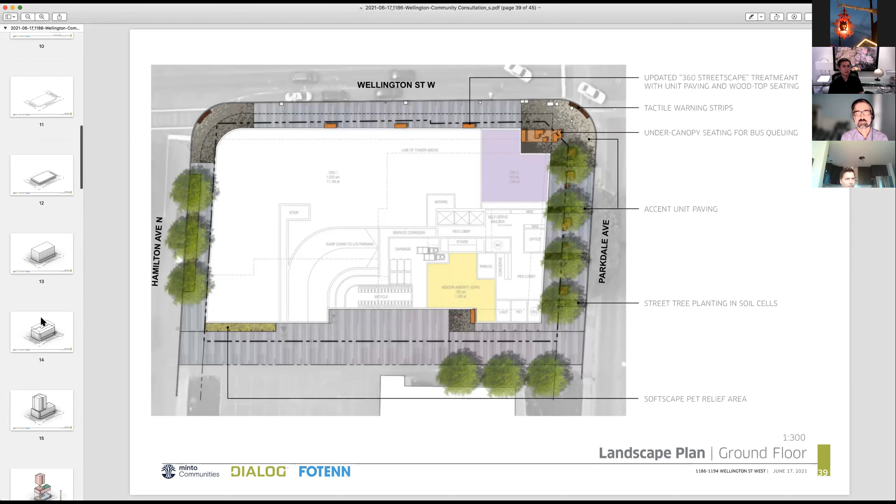How do visitors get into the underground parking? For visitors, there'll be an interphone on the garage ramp. Typically, you use the interphone to call the resident you're visiting, and they buzz you in. It's a pretty straightforward process, and that's typically how it's done on projects nowadays if the garage is secure.

Given the traffic conditions on Parkdale, which are likely to make it difficult for morning drivers to exit the building via Parkdale, won't lots of traffic route via Hamilton to either Tyndall or Wellington, both of which are at capacity throughout the morning peak?

You're going to catch me on a process question here. Since this is the OPA and zoning stage, we look at high-level network impacts. While our network is pretty robust, we don't have Hamilton-specific operations. The pandemic also restricted our ability to collect this data, so I'd say we'll have that data in the next year or so to project onto and identify impacts at both Tyndall and Wellington for Hamilton. From a traffic assignment perspective, yes.

We are hoping the laneway will be the predominantly used point. We are currently identifying likely impacts to the south with no mitigation, and that's going to help inform the conversation about how we mitigate southbound traffic to and from the south of the site on Hamilton down to Tyndall and from Tyndall. That discussion will happen with the city, the councillor, and yourselves at future consultation. That's just the process we're in. I don't have precise answers for you right now, but in the next couple of months we'll have more, and next year we'll have a much more definite answer.

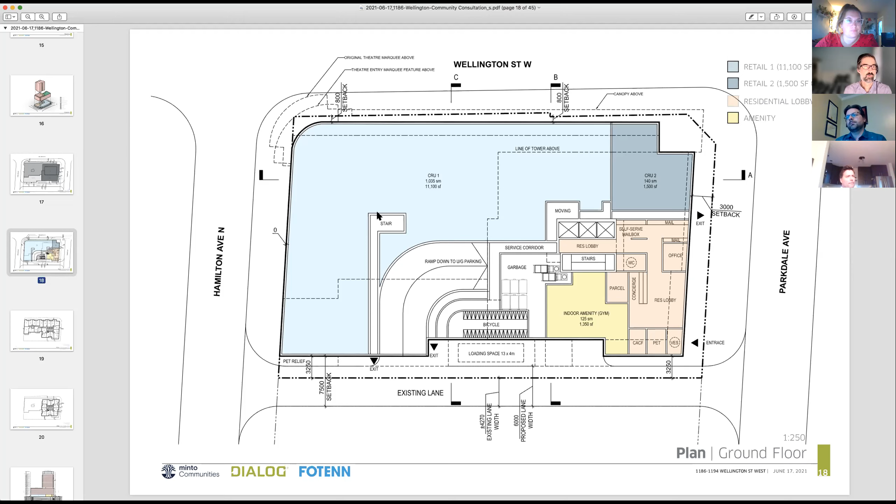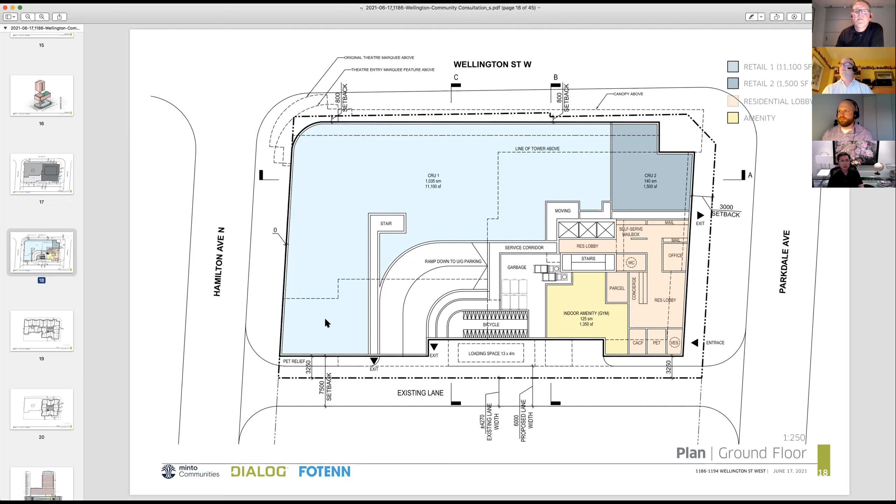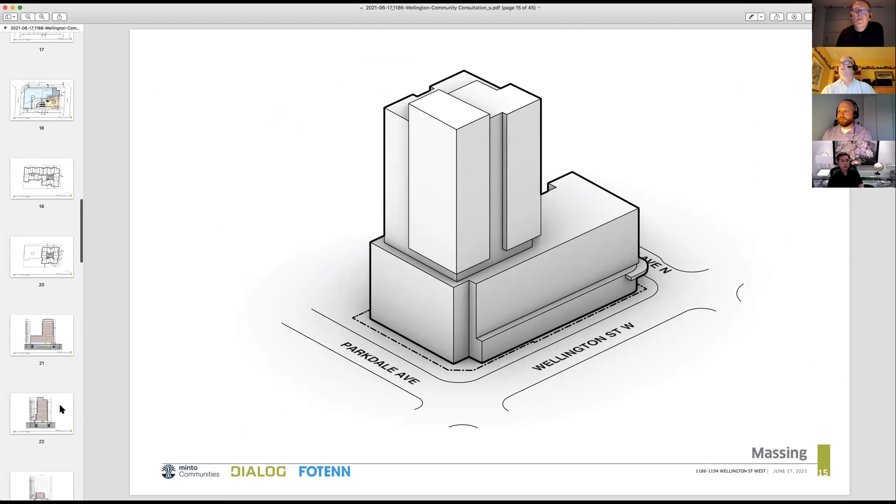Just for clarity, Helen's question regarding whether this building is 6 stories plus 18 or a total of 18 - let's get that answer out. It's 6 stories along Wellington, and then there's a 12-story tower plate on top for a total of 18. So it's not plus, it's total. That's not always clear, so it's a good question. A 6-story podium, and then the small tower plate going up from there - you can see that in the section.

That's a great question. Will Parkdale be expanded to meet the extra traffic toward the highway? That's in the developer's purview to do, but I can tell you the city will virtually certainly not look at that. We are focused not on road expansions, but on getting our active transit and public transit up to snuff so it becomes a preferable option.

Will there be any street parking for residents if they need that? I don't believe so - Hamilton Avenue North is a permit zone, so you're not allowed to get street parking, and I don't believe this development would trigger the city to allow that. One thing I've been asking all developers proposing things with fewer than 1 spot per unit, which is most of them today, is to be really clear with prospective tenants that if there's no spot available, they won't be able to move in with a car because there is no parking anywhere else in the neighborhood.

Another attendee asks, Councillor, how will the city meet the needs of residents in terms of recreation and parks? Do we have the facilities to welcome 240 plus households? I would encourage you to take a look at the Parks and Recreation Master Plan, and engage with the Wellington Village, Mechanicsville, and Civic Hospital Community Associations. Between the end of Scott at Churchill and LeBreton Flats, we're going to see tens of thousands of new residents. This is just one building among many, and we have a more holistic plan through the city's official plan and master planning processes. So please get involved with your community associations so they can advocate for realistic, paid for plans to get our parks and recreation infrastructure in the ward up to snuff.

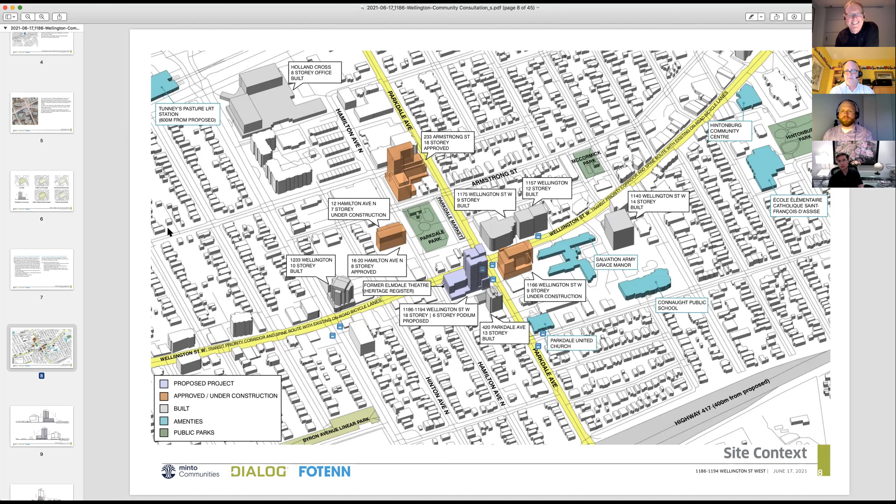Fiona, rather than just turning it over to you, I know you're going to turn it back over to me. First off, thank you very much to the development team for showing the plans this evening, and thank you, residents, for coming out. We finally ended up with, how many participants are there, Fiona? There are 23 attendees. I think it went up to 32. So obviously a high level of interest.

This presentation will be made available on our ward YouTube channel. The consultation really hasn't even begun yet, so tonight was your opportunity to get a first glimpse of the proposal and ask your questions about it. I would encourage everyone to become involved with their community association. Every one of the community associations in the area is likely going to submit thoughts and comments to the planner once this becomes an actual application and the consultation begins. I would encourage you to copy me on anything sent to the city planners so I can take that into account as I determine my own approach.

What I heard this evening is unsurprising. Obviously the height of the building, which is significantly taller than anything else in Hintonburg, really taller than anything else until you get to Tunney's Pasture, is a really serious concern. The traffic anticipated from the building is obviously a really serious concern, and the strain on our ward's amenities, parks and infrastructure is not surprising to hear about either. So those are going to be a number of the key things we're looking at.